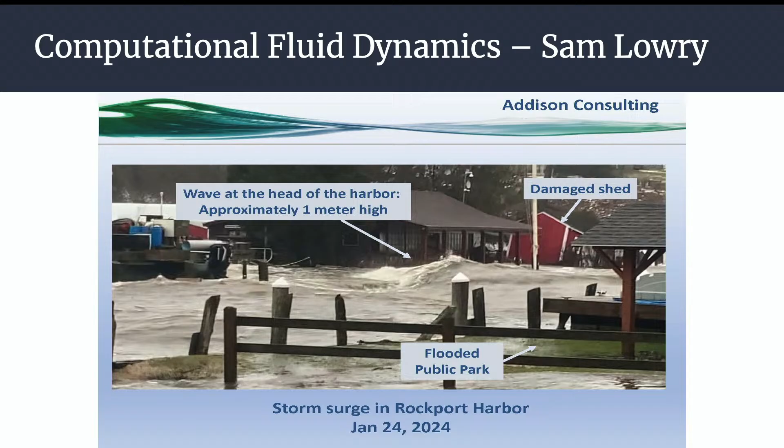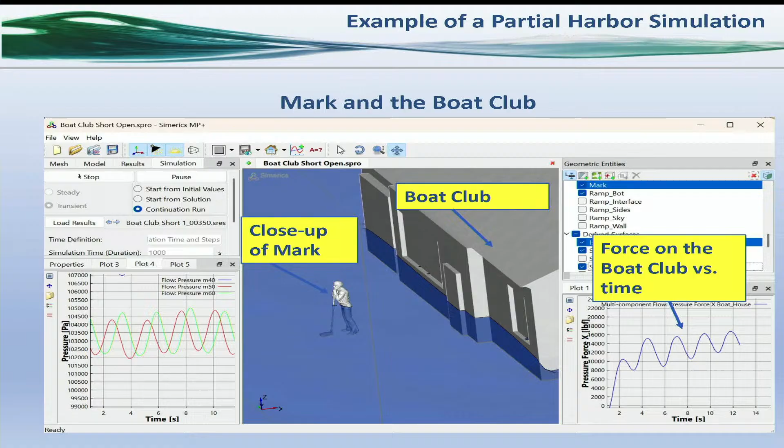But those are the kinds of things, and this is also the expertise that a guy like Sam, who's not even part of the task force, offered to help with. It helps us understand and visualize, and we can get a whole lot fancier with this - I'm not going to go through that now, but I just wanted to give you a flavor for some of that.

So what are our objectives tonight? It's to discuss the concept plans. Blake and Todd are going to get up and say, here's what we think we can build. Some of us have seen various iterations of that, and it's been informed by the various public input pieces he'll talk about. We want to look at what we think we want to do, and want to solicit questions and feedback.

That's the most critical part, because we might think it's a good idea, you might think it's a dumb idea, or you might say yeah, that's good, but did you think about that? We're not all seeing the same thing - we all have our own perspective. So the idea is to draw you guys out and say, I like that idea, or I think that's a bad thing because of this, whatever. So that's what we really need tonight.

He'll talk about another survey that they put together that we'll put out townwide as well. That'll inform the final deliverable that we have in July, that we present to the town as a whole. And ultimately it will come to a vote, to the town itself to say, is this something we want to do? So without further ado, that's all I have to say.

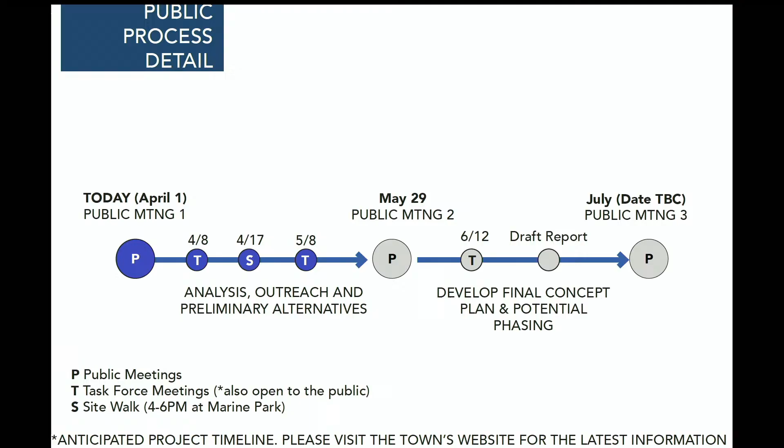So before I get into any of our proposed solutions, I might just bring up Todd Coffin from WSP, our engineering partner, just to baseline a little bit of the flood mapping exercise that began our work. Thanks, Blake. Again, Todd Coffin. I'm a geologist and a project manager with WSP, an engineering firm located in Portland, Maine.

I want to cover just a few initial concepts that we discussed at the kickoff meeting in April, just to help lay the groundwork. One is that Maine's climate is getting warmer and wetter.

If you look at plots of average annual temperature, you see a steady rise since the early 1900s, with no sign of that being abated even through today, and likewise increasing average annual precipitation. At the same time, we have warming of Maine's coastal waters, which are fueling more powerful storms, and it feels like those storms are even occurring more frequently. We just think back at January 2024, the nearly back-to-back storms and the impacts, and how it felt like the frequency is really increasing in those storm events.

And on top of that, we have a parallel effect of melting of global polar ice caps, as well as glacial ice, and the thermal expansion of the oceans, causing, as Bill mentioned, steady increases in sea level rise.

So what we decided to do in combination with Richardson Associates was develop a series of flood maps, which would baseline, as you can see in the shaded area, the base 100-year FEMA flood zone. But on top of that, we've developed 3 sea level rise scenarios. The first being 0.8 feet by 2030, 1.5 feet by 2050, and 3.9 feet by 2100.

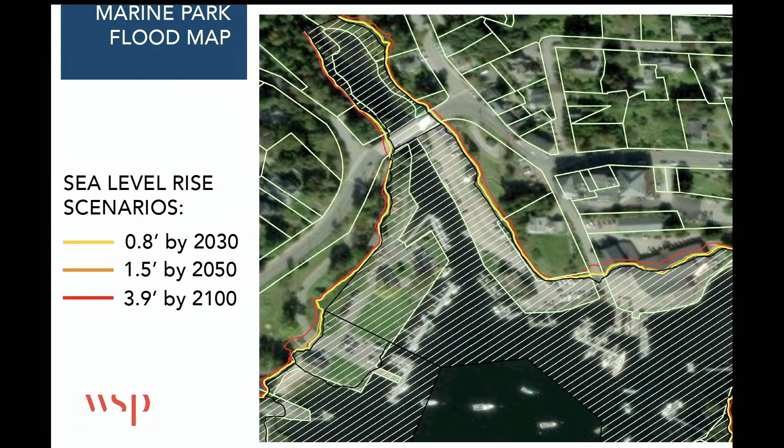But what does happen is that water depth becomes significantly deep during a major storm event. So you could have as much as 4 to 6 feet of flood water during the 100-year storm, which is a pretty powerful storm, by 2050, and even 6 to 9 feet of inundation in a powerful storm by 2100. So planning needs to consider those different scenarios, and whether it's incremental planning or if you're rebuilding a structure, you need to be mindful of those sea level rise scenarios, and that's the purpose of these maps.

And we also took a look, further southwest in Rockport's harbor, looking at Walker Park, where there is a bit more inundation by the 2100, 3.9 foot scenario, because there's a little bit of a low-lying trough along the topography in that park. So that is a little bit more vulnerable because of the landscape that's there in this location.

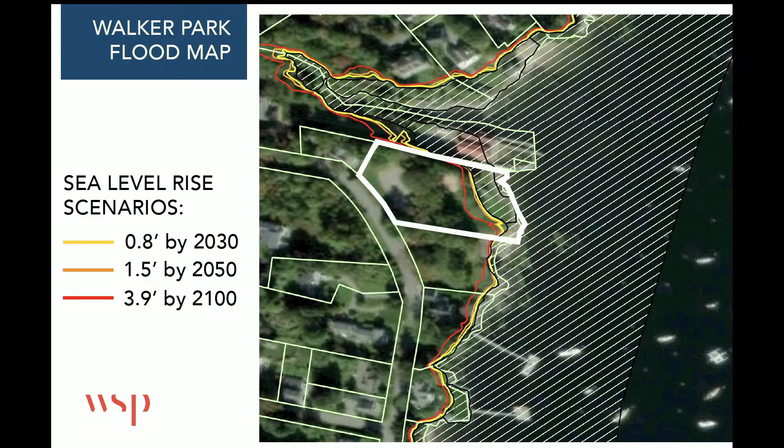I will note that in the formal maps that we presented to the town, there is more detail of the flood elevations, the various flood zones, but that's a lot of detail that really isn't necessary in this context. We just want to convey that the maps have been developed, and we'll see during Blake's discussion, and I'll add some commentary, plots that are showing the different flood levels, critical elevations of the ground surface or the floor levels of buildings, which help us understand the vulnerability in different parts of the harbor.

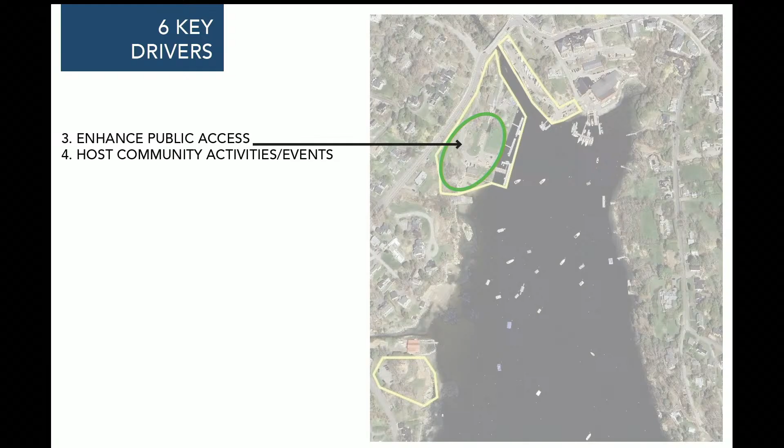How do we approach that? We developed 6 key drivers: one is to support the working waterfront, second is to look at the future of the boat club, third is to enhance public access and host community activities and events, the fifth would be enable harbor operations, and the sixth might be foster ecology, education, and play.

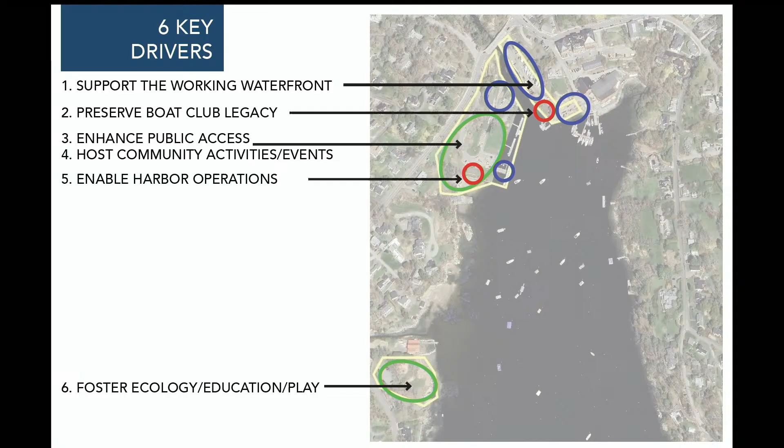If you bring that all together, we're hopeful that the preferred strategy is not just meeting one need, but rather a balanced plan that meets all of these needs. It seems to us that the way this place operates today, it does many different things for many different people, and we've been trying to balance all of that.

After the last public meeting, there was a request at the task force session for a follow-up to see if WSP and RNA would be willing to come back out to the site for another site walk. We said sure thing. So we were out there, primarily joined by representatives of the boat club and folks from the working waterfront. That was an opportunity for us to go deeper on a lot of items and really hear firsthand. I was sitting there with a clipboard, jotting things down, and that was incredibly valuable.

Special thanks to all the folks who joined us for that trip, and many of the task force members also were there. Out of that, we produced what we called the site walk notes, which has all sorts of input. There were things some of the commercial fishermen cited that they thought were actually working fine, and then other areas where people said there's a real problem here that needs to be addressed.

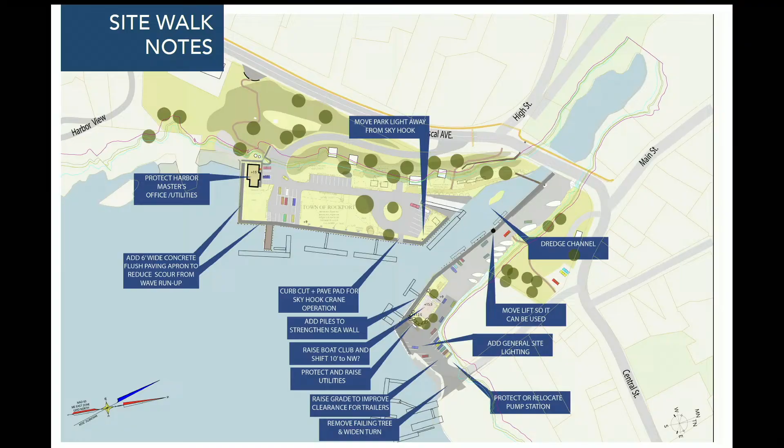That was also building on some information we had received from the harbor master about operations and things. If you combine all of the input from the public surveys, the input from the task force, the input from the harbor master, and these various site walks, there was a lot of data points. So let's get into proposed scenarios.

The existing conditions for Marine Park is where we'll start. Just to orient y'all, this is Pascal Avenue, High Street, and the entry into Marine Park as you understand it today. This is nothing proposed, just the lay of the land. You've got the harbor master's office here, there's the pier, there's parking in a few different areas, there's the drop off to the boat ramp.

The lime kilns are these rectangles in white. There's the Ped Bridge over to the commercial side of the harbor. The boat club is located here, and then Rockport Marine would be just here.

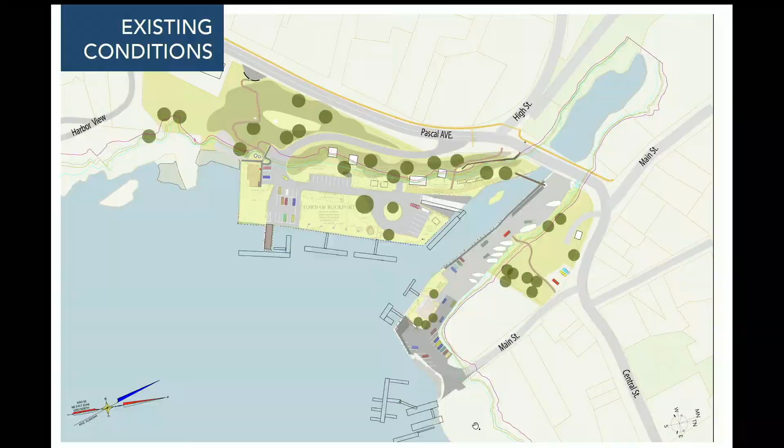So if we start at the boat club, what we're seeing in these flood scenarios is that in 100-year base flood elevation, there's significant concern for a building like this one. The do-nothing scenario would mean likely that this would struggle to exist in the future.

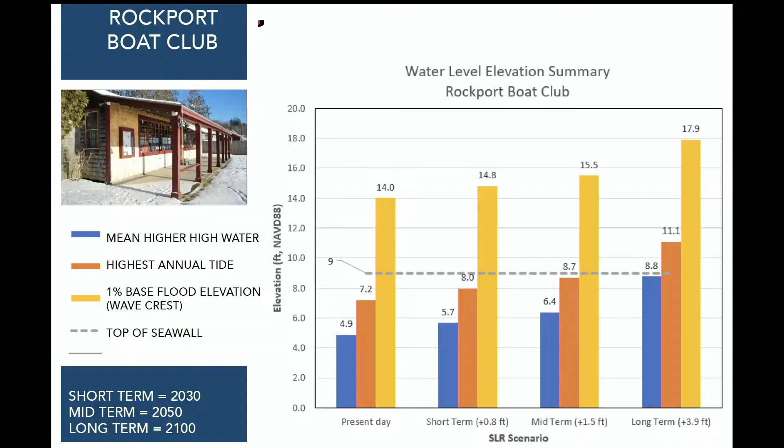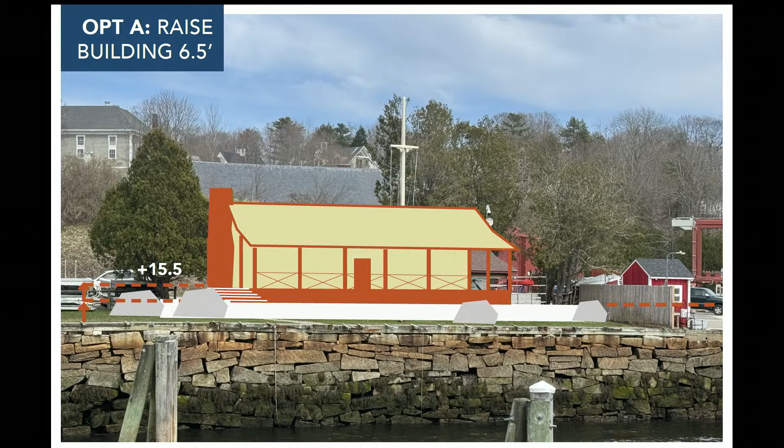This is what the boat club looks like today, as I'm sure you all know. The thinking here is that rather than elevate everything on this side of the harbor, which could be incredibly expensive and daunting, we might focus on key zones that are particularly vulnerable, like the boat club.

So a structure like this could be raised, and there are examples of that accomplished in Maine, some using various grant funds. A structure like this one has some historic merits that could also lend itself to that sort of funding.

The thought with this scenario is to raise the finished floor 6.5 feet and have the boat club in the same location. If you were to do that, you might consider doing it in sort of 2 lifts.

So the white area here would be a terrace that's created, about 3 feet higher than existing grade today. And then there would be another 3 feet or so up to the boat club.

If you augment a building, as we're suggesting here, oftentimes there's a requirement to bring the building up to code, and it's best practice to make these structures accessible to everyone. So it would be accessible through the use of a ramp system that brings you to the front door on the porch. There could also be a stair system.

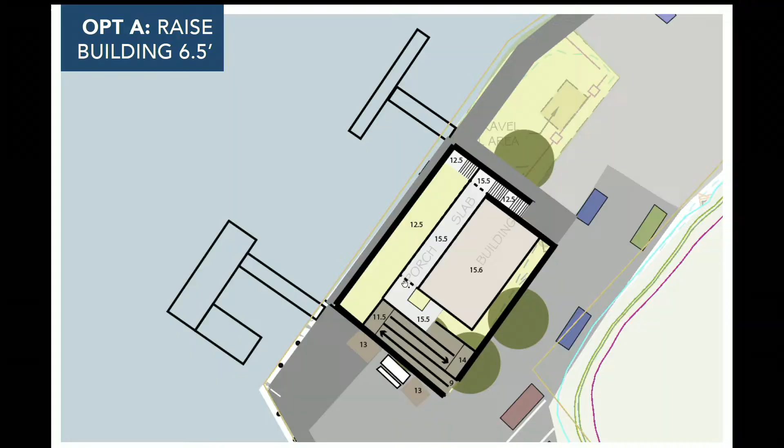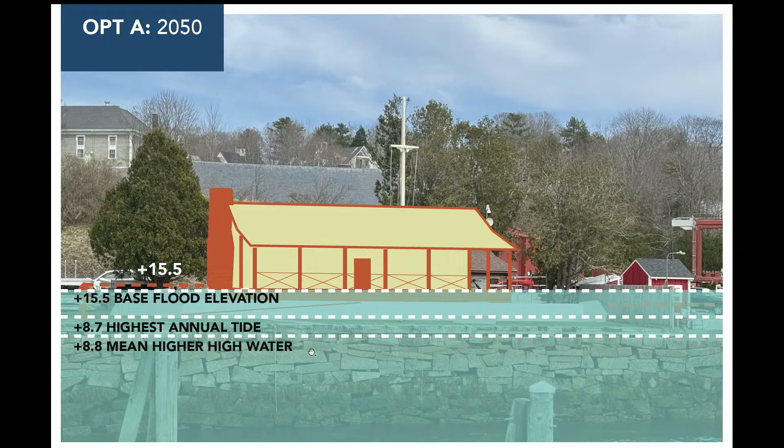By going up to 15.5 feet for the finished floor elevation, it's above even the 1% flood scenario in 2050. The mean high water line is much lower, as is the annual high tide.

There may be questions: is 6.5 feet high enough? What happens after 2050? These are good questions, and it would be short-sighted not to anticipate changes. Sea level rise may happen more quickly than studies today are estimating, or things may be on track, but we hit 2050 and need another adaptation measure.

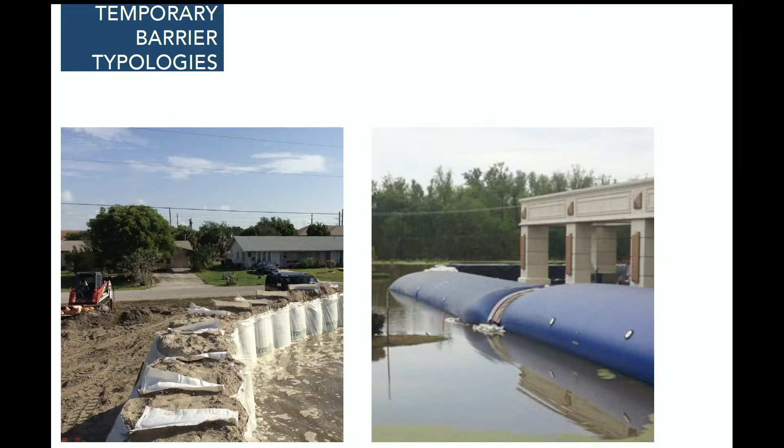One thought is that by creating that lower terrace, it provides a platform where temporary elements could exist. Really what you're struggling with beyond 2050 is the scenario of a major storm event—it's not addressing mean high tide, which is lower. So there could be an element like that, with various low-tech ways to do it, and more high-tech measures that could be considered.

You could also consider elevating the building higher. What does it look like if you go up 9 feet instead of 6.5? If you were up 9 feet, you're basically a story higher. You might be picturing structures like those in places like the Outer Banks in North Carolina, where the lower level of the building is not the main floor in many cases. There's a building typology that can work in that scenario, but there are also some trade-offs.

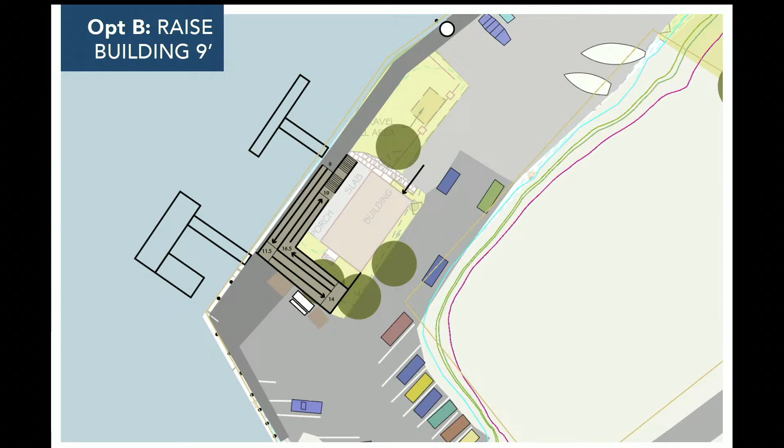This was looking at the amount of ramp needed if you were making it fully accessible, and that may be a reason not to jump to the 9-foot scenario right away. But we thought it was worth doing the study to just look at how that may play out.

So the recommendation from the consultant team is to look at that 6.5-foot scenario, which seems to address any near-term risk, mid-term risk, and there's the option to address additional flooding in the future.

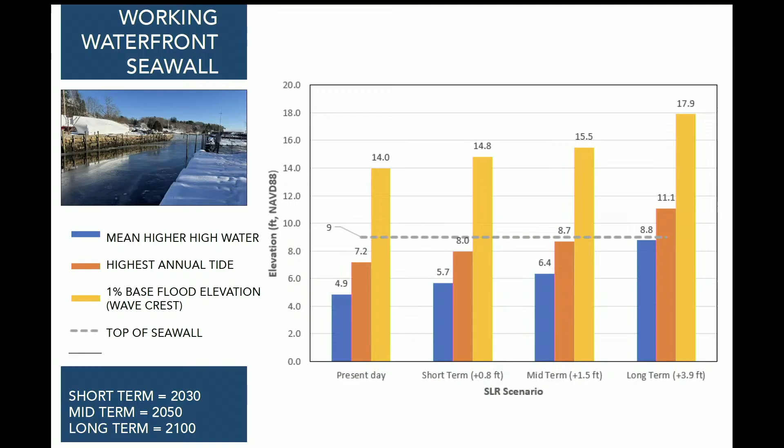The next area we look at is the working waterfront seawall. When we met with the commercial fishing folks out here, what they asked for was something to alleviate their concern of scour at the water's edge, which is basically destabilizing the granite block wall—water will overtop and carve out land because there's just an aggregate surface there today.

Where they do have concrete, they cited that those areas are more resilient to flood damage, so the request was to think about adding a 6-foot band of pavement there so scour is reduced and they're still able to access the edge of the bulkhead wall with their vehicles.

There are places that have done things like that. It's also an opportunity, in our mind, if you're investing in hardening that edge, to think about potentially designating different uses for different zones so people are clear on how it's used, if that's helpful. And paint is very cheap, so just because it's a working aspect of the harbor doesn't mean it can't get a little love.

There's also just some engineering measures that might need to be considered. So Todd Coffin was going to talk a little bit about your current seawall and things to think about in the future.

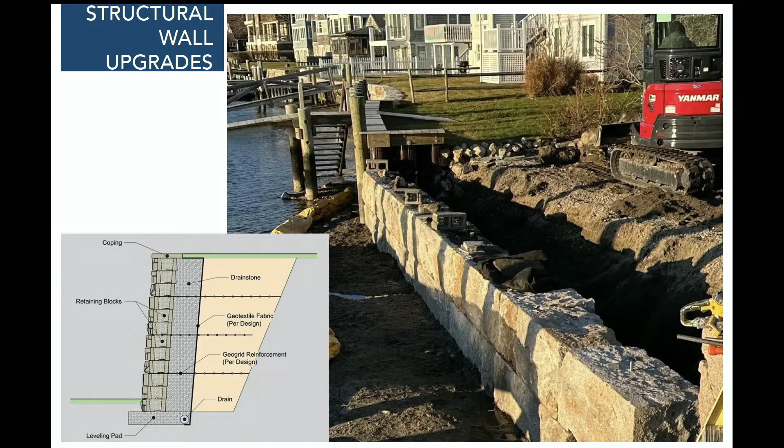It may be really distinct areas where the stress is being observed at the ground surface. But right now, we really don't understand what's happening. There would need to be some further identification of what the source is and how big the opening might be at depth that's causing the ground surface to collapse.

But this is an opportunity to invest in, and we think prioritize some of the investment, because if it's left unabated, soils could continue to wash out and ultimately threaten the stability of the seawall and the soil and embankment around the boat club building.

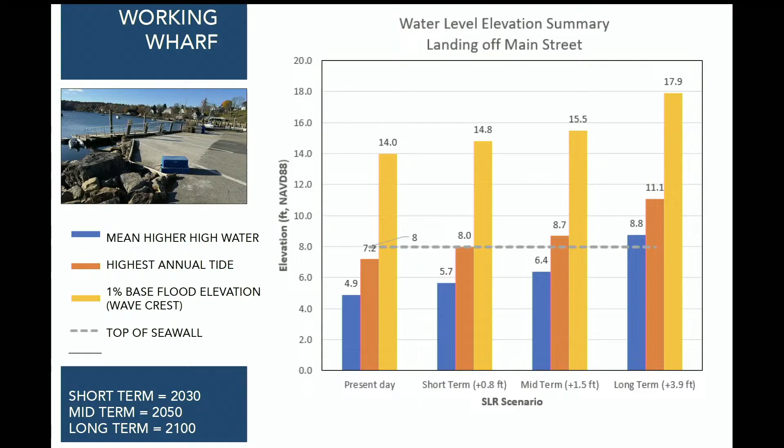And then the working wharf is the next area, and this is one of those areas that's actually more prone to flooding, so it would benefit from just slightly raising this. Remember the boat club we were just looking at, we were talking about raising the land there, and so the thinking is that this would just be raised 2 feet up to that interface, which should work fine.

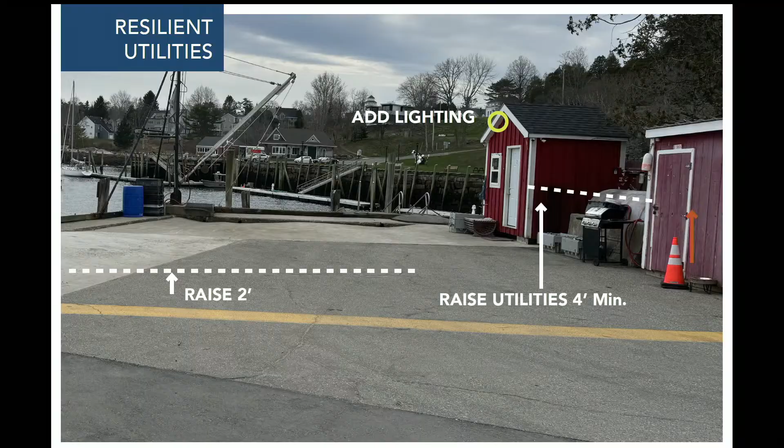And then there's a question of the utilities in this area, and those would want to be raised slightly higher or protected, but today they're unprotected and a liability of sorts.

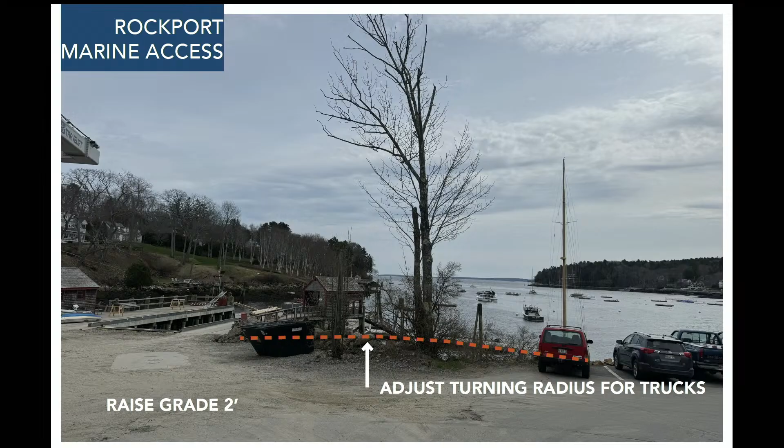Around the corner from that, as you're moving toward Rockport Marine, the benefit of raising the grade here, as we understand it, is just that there's really low clearance, and it makes operations in that transition from this area over to Rockport Marine challenging for vehicles with low beds. And so there's an added benefit here by raising grade. At the same time, the truck turning movement could be facilitated by adjusting the turning radius in this location so that that accommodates those movements.

That's some of the recommendations associated with the commercial side of things. In general, what we were hearing is that folks didn't want a large amount of change. At one point they asked us to consider moving the boat club over, and then the most recent correspondence we've had is that they think it's actually enough room as they have it today.

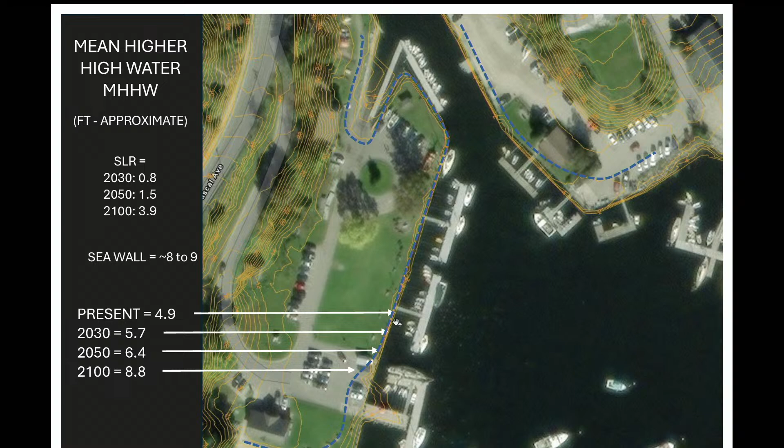And so our approach has been a little bit pinpointed in where changes are proposed. On the park side of things, there's also flood inundation concerns. From the mean higher high water standpoint, for the most part, the existing seawall manages those. But when you look at the highest annual tide, then you do see overtopping.

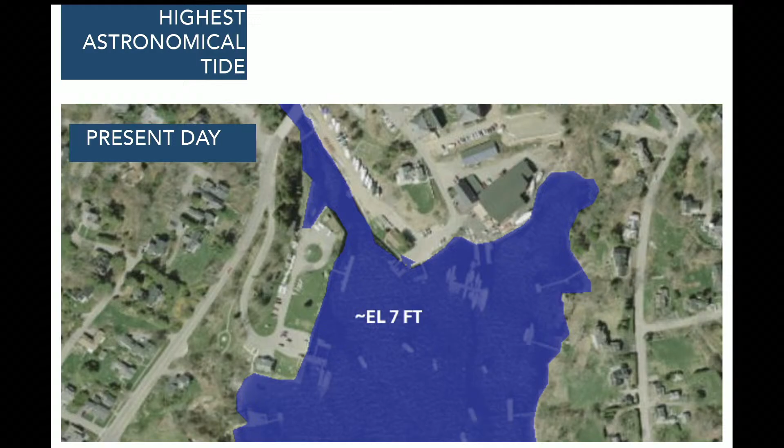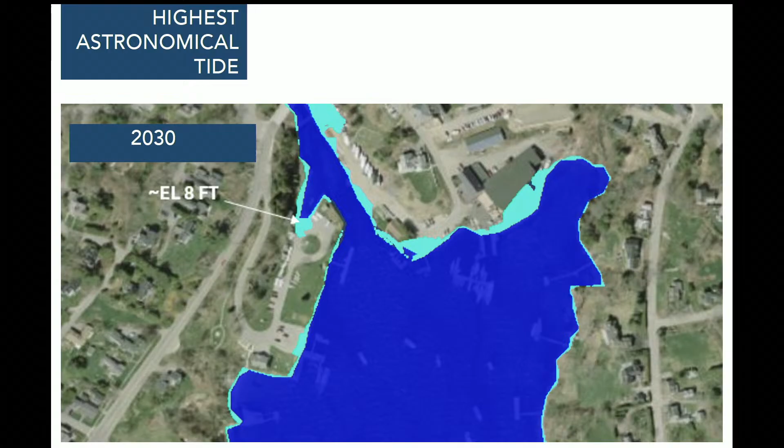So during the storm events from the past few years, there has been some overtopping. And if you look at what's projected for 2030, then 2050 and 2100, then the park is likely to be overtopped. So the question becomes, does all of this get raised? And our thinking is probably not.

Having a resilient waterfront doesn't mean walling yourself off from the water. It means having a strategy in place that enables this place to move into the future in a way that makes sense for your community. And we have a strategy to do that.

So at the moment, the concern is more that when there's an event like that, there's annually a lot of repair work, and that's getting old and unsustainable. So one thought was, well, if you've got this idea of having a ribbon around the edge of the park that's this sort of hardened apron that alleviates some of the concern for displacement of material behind the seawall, what can that do for the people whose priorities are for this to be a great recreational spot?

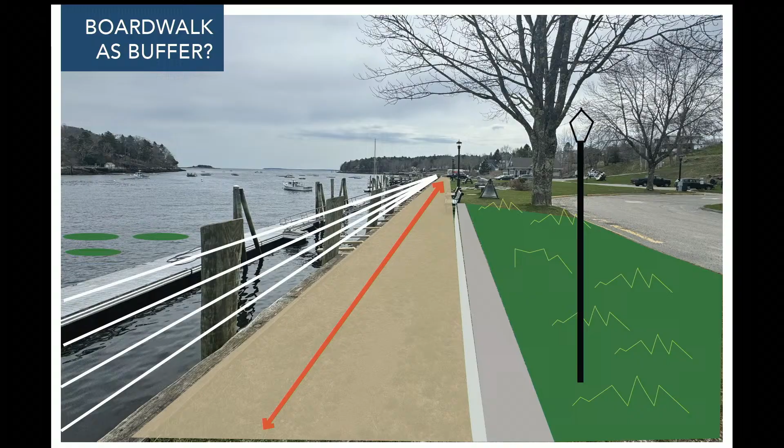And so our mind was, can we think of this as a boardwalk that becomes a buffer? If you're out there today, there's actually not a lot of pedestrian infrastructure in the park. And if you're someone who relies on a wheelchair or is less mobile or that sort of thing, then what's incredibly helpful is having a path that's actually paved in something more sturdy and stable.

If you think back at what we were seeing from people's top priority, access to these public open spaces was number one in terms of the response. And today there's pretty limited access, and it can be quite challenging to get here, and once you're here, to get from one spot to the next.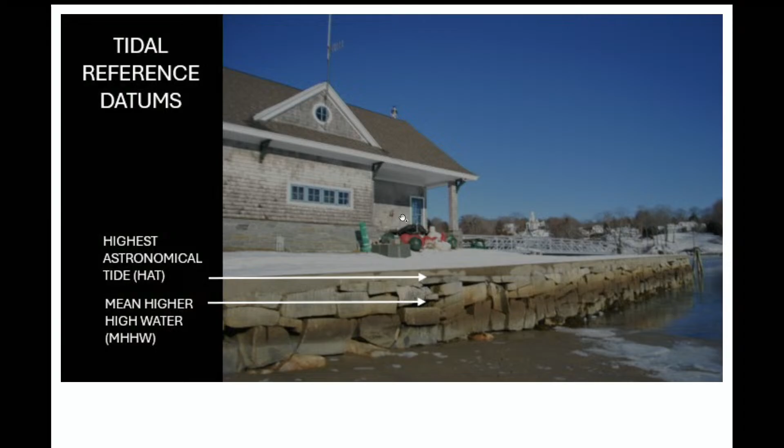So I had mentioned the Harbor Master's office. We've talked about the different flood projections. In general, this building is sited in a way that's slightly more advantageous than the boat club, and as you can see, the construction is more sturdy.

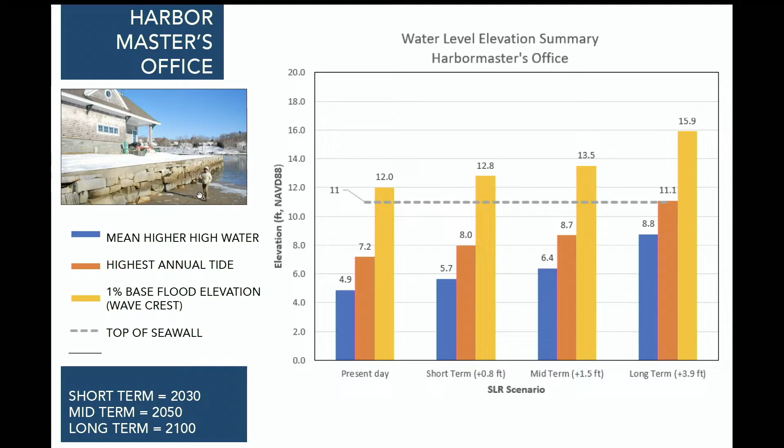So it's less, we believe, at risk in the near term. The elevation is at 11, so all the way through nearly 2100, you're above the highest annual tide line. It's just the 1% base flood that we would be concerned with. For that reason, we don't see a need to relocate it in the near term. It's just a matter of dry flood proofing, and by having that apron in the foreground, we're hopeful that the scour near the building would be alleviated.

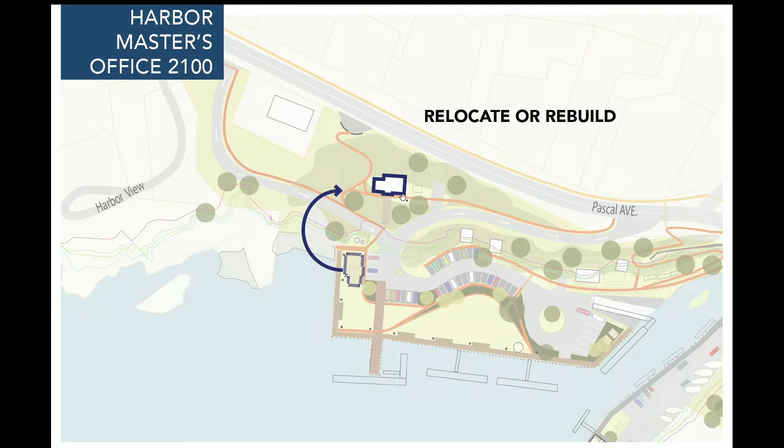And the utilities around it could be armored. In the long term, though, there is a spot that we feel would be probably a pretty good location for that structure. So the thinking with this master plan is just we would recommend that spot is left open so that possibility remains in the future.

The last piece, and then we'll move to Q&A, is just Walker Park. Walker Park today is susceptible to flooding. This is the 2030 line, 2050 line, and 2100. Over time, it's anticipated that more of Walker Park is at risk during a major storm event, although the playground area here in tan is out of that area of risk as anticipated.

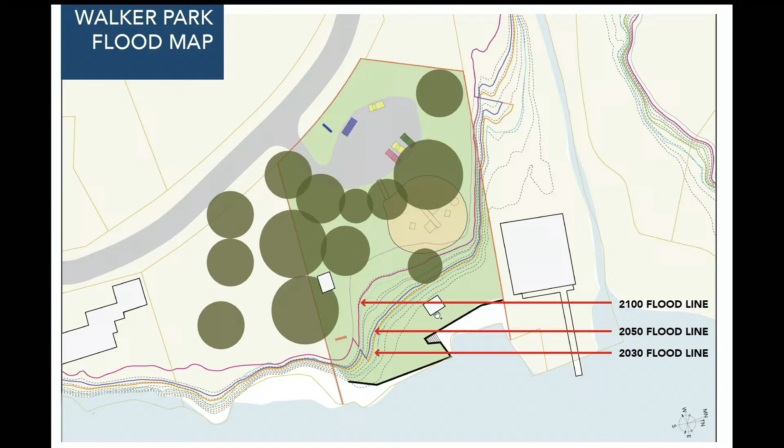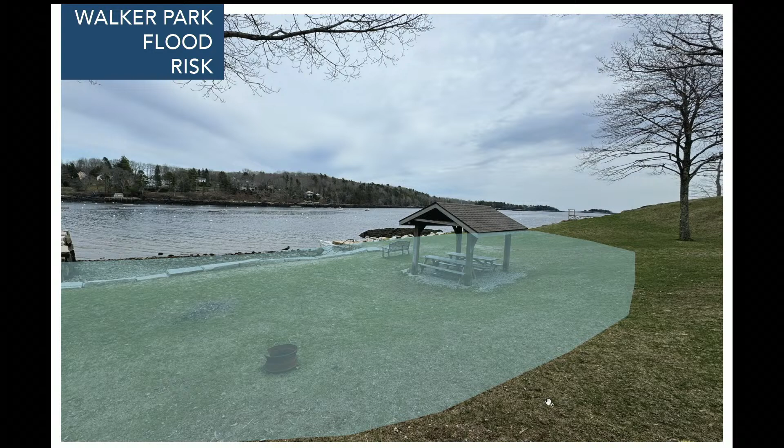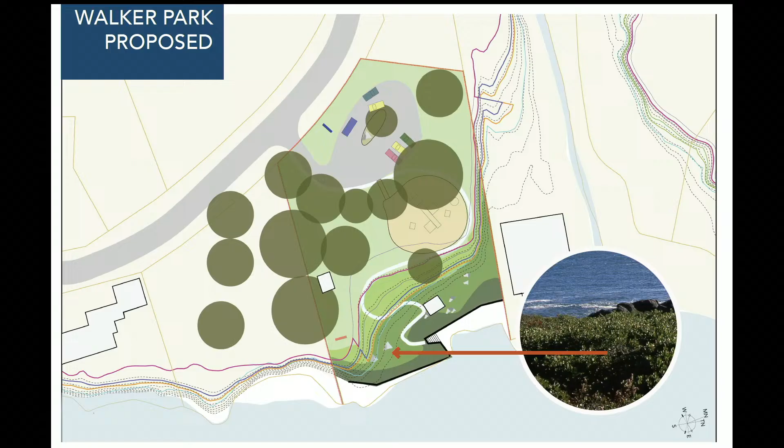This little white box is the picnic shelter you may be familiar with. It's within that zone. So here's an image of what Walker Park looks like today and the area that's susceptible to flooding. The thinking here is that it might be a great spot to look at nature-based solutions and plant the bank where flooding is anticipated.

We would, of course, recommend native planting materials appropriate for slope stabilization, which could be coupled with geotech fabrics or various other elements to underpin that and provide another measure of resilience, while still allowing access to the water's edge, creating habitat, and being a great spot for interpretive signage, knowing that there's all kinds of kids and families who utilize that spot. So it could be an awesome opportunity to daylight that to folks and create one less thing to mow.

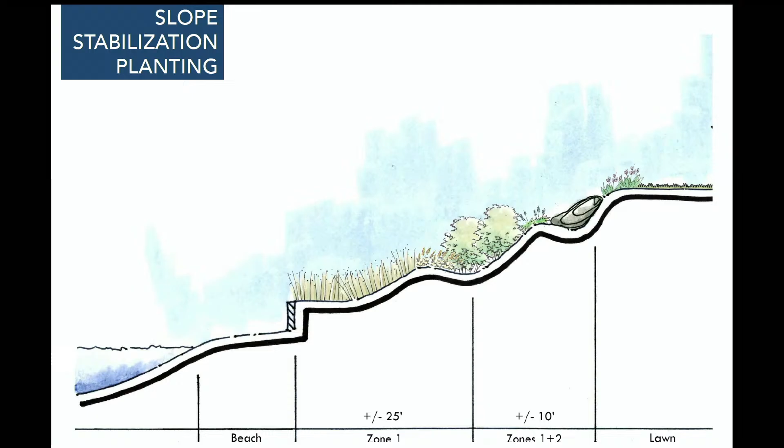So on the plus side, a little less maintenance in that respect. Just some images of how that transition from the lawn to a more native palette on the water's edge might work. In this case, you've got topography working for you, so you're going to be looking out over that. It's not going to block the view of the water.

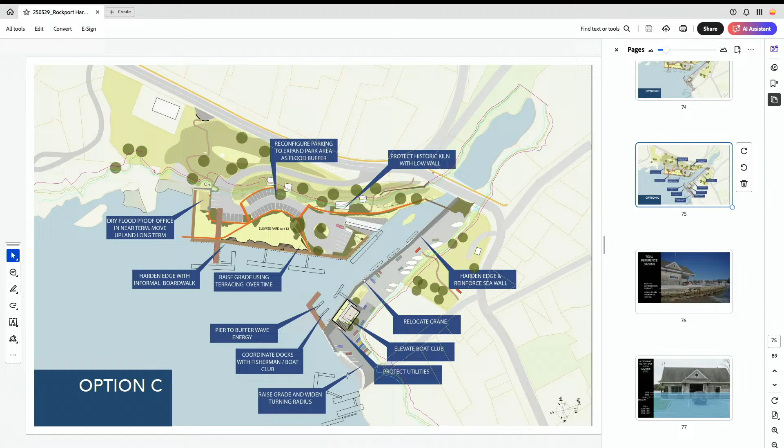To the earlier point about concern over adjacent properties, one of the things we talked about early on in the task force meetings was that we had to pay attention and do no harm to adjacent properties. In other words, we don't need to make it worse for Sam over at Rockport Marine because we decided to deflect all our waves his direction. That's not functional. And Sam's on the task force, so he's well aware of that. There is concern that we don't do that, and we discussed it early on.

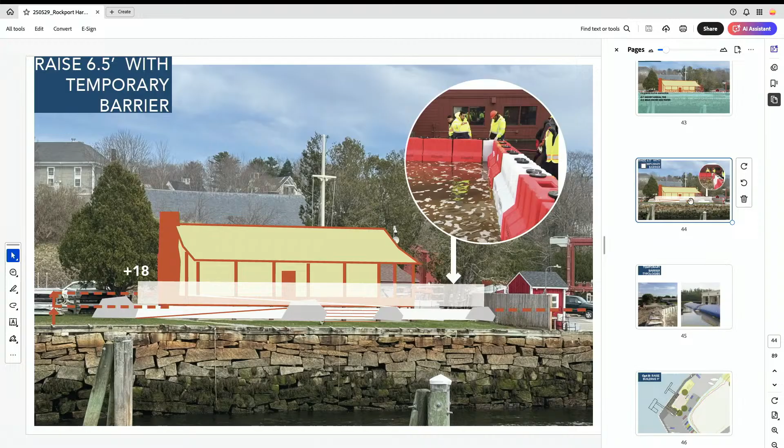I also wanted to highlight a couple of the slides Blake showed with temporary measures that are brought in—almost the equivalent of a Jersey barrier or stacked mooring blocks—that, in advance of a predicted storm, you bring in to knock the wave heights down 2 or 3 feet. That's essentially what a small breakwater or jetty does, or even a larger breakwater at the mouth of the harbor. But these are lower cost, highly mobile systems that can be brought in and removed if a storm is coming, versus the expense, time, permitting, and potential impact of a larger breakwater structure.

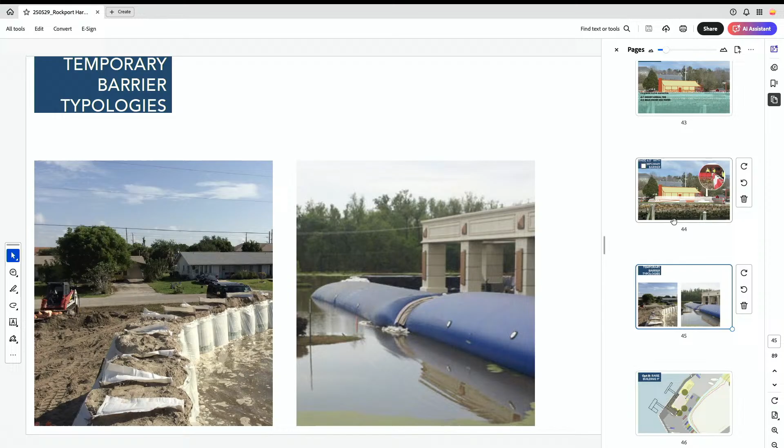So we're trying to be practical, but we think there's innovation in temporary structures like inflatable ones—you inflate it with water and it becomes very sturdy and resilient—or sand-filled boxes. You see these now at Popham Beach, placed in front of the Coast Guard station as a temporary protective measure. We're trying to find nimble, cost-beneficial solutions without building a major structure. But those larger structures have their place too, in some settings.

You have to have ideas, right, or thoughts. How does it feel to lose the parking area that right now divides the area next to the harbor master's office from the rest of the park? How do folks feel about making that more of a continuous park instead of the way it's currently configured? Abby, do you want to say anything? Give a thumbs up.

I appreciate that we're not losing any parking—we're actually gaining parking, is that correct? Yep. And the fact that it's continuous green space is a huge benefit, because right now a parking lot separates the two green spaces, and we've had kids actually hit by cars, one of which is my nephew, because you can't see around—it's not safe the way it is. It's not efficient. There are so many things it's not.

So no, I appreciate that funnel that comes around in the S—it's still the same width, right? Yep. And I know the entrance was fairly cost prohibitive when looked at initially—would that concept be in the B plan?

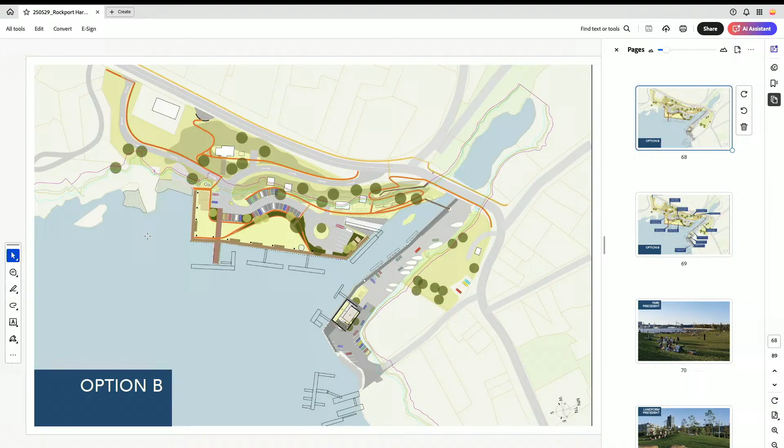Making it easy to get people in and out is a double-edged sword. We're already at a saturation point at times down there, where it gets crowded. Right now it's not super easy to get down there, you need some local knowledge. That's part of the charm, in a way, people have to really want to be there. But it would be a lot safer to have an easy way in and out, so I'm talking out of both sides of my mouth.

Could you show option A also, please? Sure, yeah.

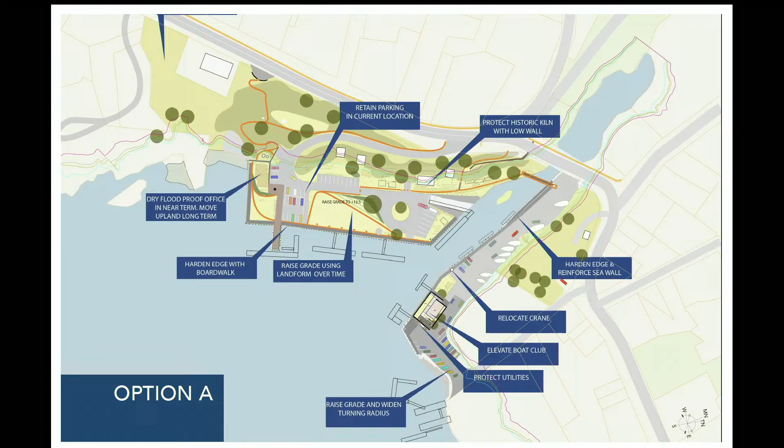Is there any reason the wharf extension couldn't be included in option A and option B also? Nope, it could be incorporated. The way the survey works, we ask folks to identify if they like A, B, or C, or none of the above, and there's a comment field. So if you like one option but want elements from another, add that to the comment field, and we'll track which elements from each should be incorporated.

Thank you. Blake, if you go back to option C.

Wait a minute, what happened to the one with the extra, where the entrance was different? Sorry, that's B. So where the entrance is right now, you've got a red line there, is that simulating an actual drive where a car could come through? Yeah, so the idea is there's a curb cut and an entry road shown in gray, and the orange color is pedestrian movement.

It seems like if you go through the trouble of putting in the entry drive, having a sidewalk associated would be advantageous. Then there's potential for connection to a point of crossing. As you know, the continuous sidewalk is on this side, and there'd be a desire for a safe point of crossing, looking at view cones.

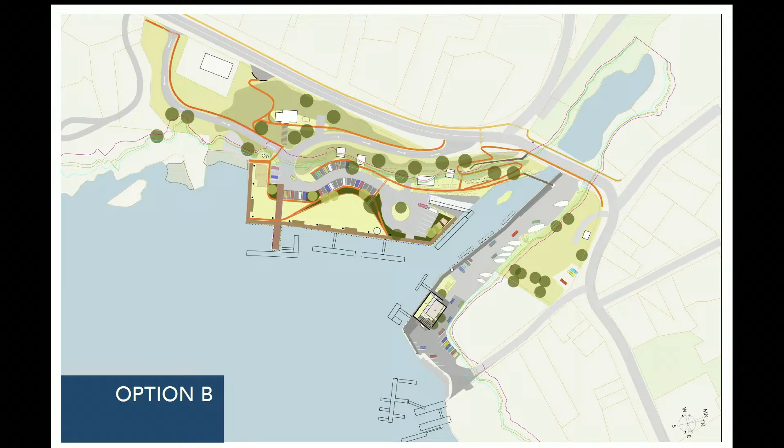I think the other opportunity is to think about, if you're relocating the parking stalls, are those just standard asphalt, or would we think about permeable paving? Thinking about permeable paving does a couple things: it breaks down visually the width of the road and might help with traffic calming, but it also means you're not sheet flowing water into those planted systems. There could be some strategies like that, but that's a really good point that needs to be considered to avoid unintended consequences where we create a bathtub.

Just to Bill's question about comments on rearranging the entrance and the curve in the park within Marine Park—as I read that, I'm thinking there's a berm that the parking in that new curve works with. Yeah, I think that's a really great idea, and I agree with Abby and Bill that we're frequent users of Marine Park, but setting that parking back up against the steeper hill is a very good use of that unused space you pointed out.

I think having a little slope on Marine Park would be very good, and the new park at RES will provide a lot of flat playing field. So that's just feedback. No, that's really helpful to know. Hopefully for the preferred scenario at the end, we'll model it so you all can spin around in the thing and see it—sometimes it's hard to get that sense in the 2D plan.

Any other questions or comments?